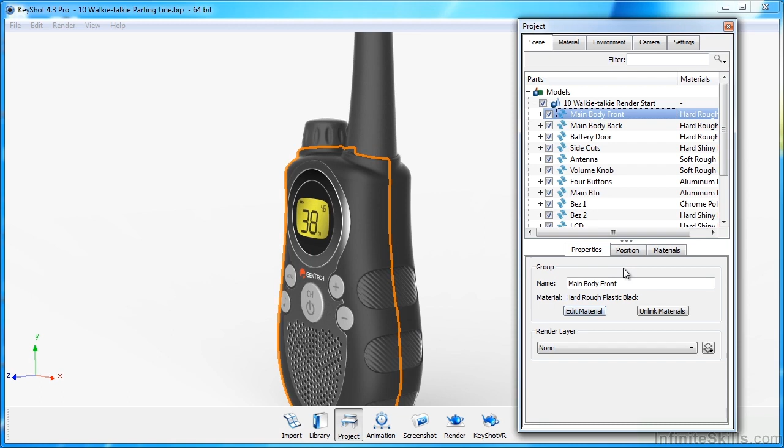When we cut these, I had us intentionally not put a fillet edge on those because I knew it was going to be kind of difficult. And I also knew that we could just go ahead and add that right within KeyShot.

Let's get an angle here so we can make sure we're seeing this nicely. Right now there's no parting line, even though these two pieces are separate pieces. The way that we get this is we select the part, and we actually have to go in and open up the little window and individually select the actual body part itself.

Once we've done that, let me just open this a little bit larger. You can see we have some different settings here, and it's called rounded edges, and it is somewhat experimental. Found that it works out pretty good actually.

So if I just put in a 0.2 here, and I'll click off of that, you're starting to see a little bit of something there. Now it's fairly faint, but remember we're going to apply that to the next part as well. So we're going to apply the same kind of a round to the main body back.

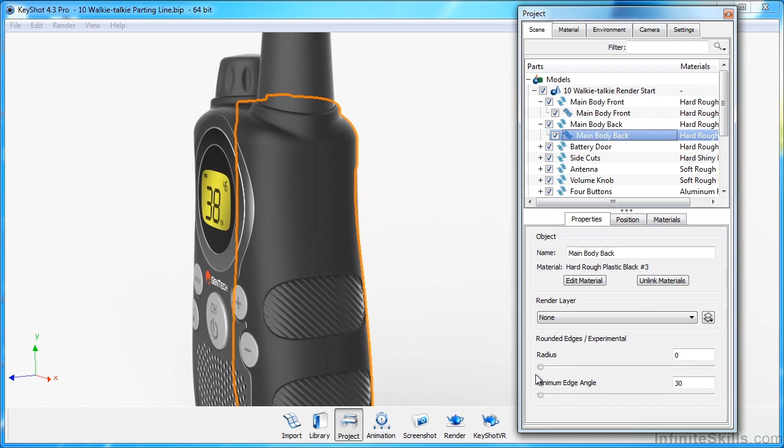Notice if I click on the main topic for this, that is not a choice for me. So I have to go into the sublayer, and now I see radius. If I make that a 0.2, you can see now we're starting to get a little bit more showing up here. Now you've got to be somewhat careful with it.

If you get too large, you're going to start to see all sorts of weird things actually happening to your geometry. You may see some faces disappearing or holes. So it's just sort of a process of finding the lowest number that's going to work good for you.

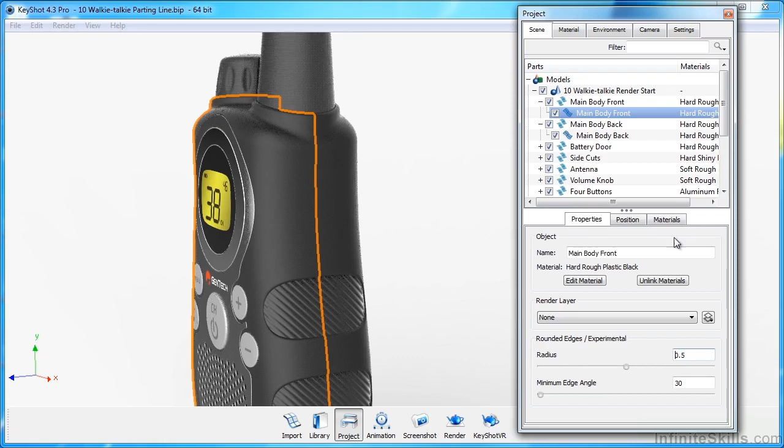Let's try a 0.5 for both of these and see what that gives me. Now you can see 0.5 is looking pretty good. Might be getting just a little bit of distortion on the edges there.

So let's knock that back just a touch and see if that fixes that for us. I'll go to a 0.4 instead of a 0.5. Oh, I'm still seeing some strangeness there. So let's make that a 0.3.

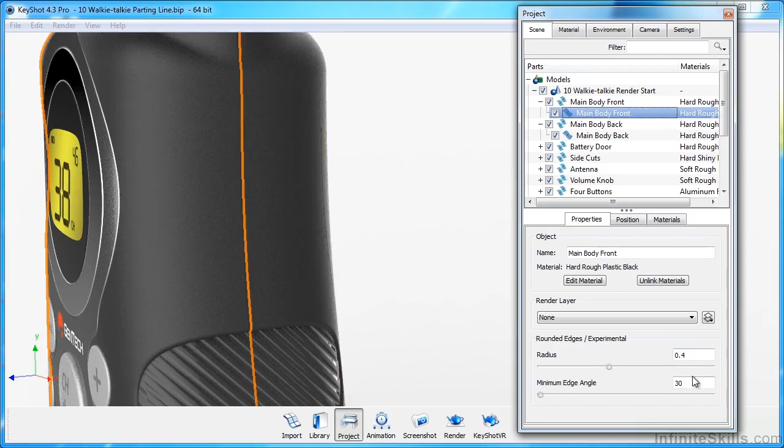Make that one a 0.3 as well. Let's knock that back even more. As I said, it's kind of an experimental feature, so it may take a little while to play with it. And it's only going to be a small amount that you're using, but it is kind of these nice things that add the nice detail into these models.

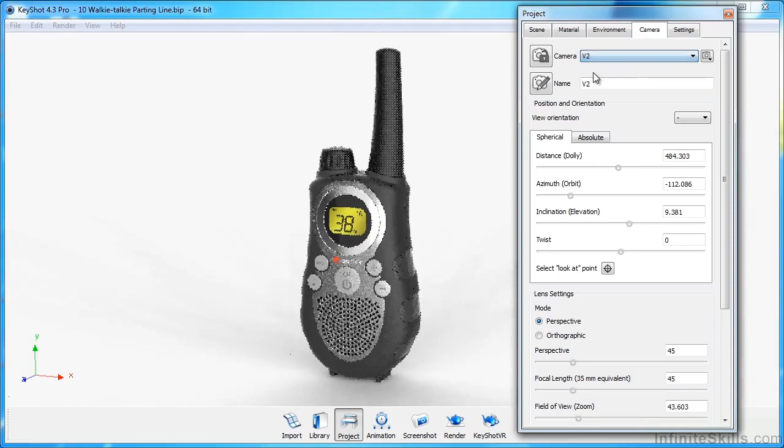So I ended up back at the 0.2 that we started at on both of these. If I go to my V2, we really can't see that. Let me try my V3. So if I run into something from the side, I might use an angle like that.

Something a little bit closer. And again, we're not looking for sort of this glaring kind of an edge. We're really just looking for something that gives an indication of something going on.

Let me make that 0.3. And that pops it just a little bit more. So now we know something's going on. A parting line isn't a detail you want everybody to notice, but it's something that's in there your eye picks up on, and that makes everything look that much more believable.

Most people leave that sort of a detail out when they're working in 3D, and I think it's those kind of details that really make it hard to tell whether your model is actually a real photograph or a 3D rendering. So that concludes our look at edge softening within KeyShot.